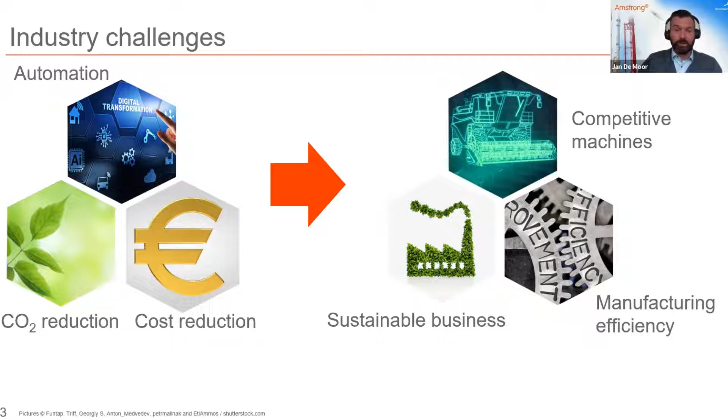The challenge is to have products more and more competitive, and at the same time the business needs to become much more sustainable. A lot of work is done on manufacturing efficiency. Today we will show you the benefits of using high-strength steels as an answer to these challenges, those of today and those of tomorrow. Without compromising the performance of the end product, smart steel grade selection will help you reach the next level of sustainable solutions at an affordable cost.

Great, thanks Jan. I've just got a question, if I may, at this stage. I wonder how the steel industry, and you and your company in particular, are implementing new technologies such as automation, which we've mentioned.

Well, we can take an example of our galvanization line in France. In a nutshell, we are completely redesigning the process with more automation, more control screens per station or workstation, more mobile tools to work along the line, but also automated and digital shape control for hot strip production with full data processing.

We could also talk about buying our steel on digital platforms with integrated EDI, where certificates, mechanical properties, order confirmations and the ordering system itself can be digitally transmitted, so that it can be completely integrated into the road map towards Industry 4.0.

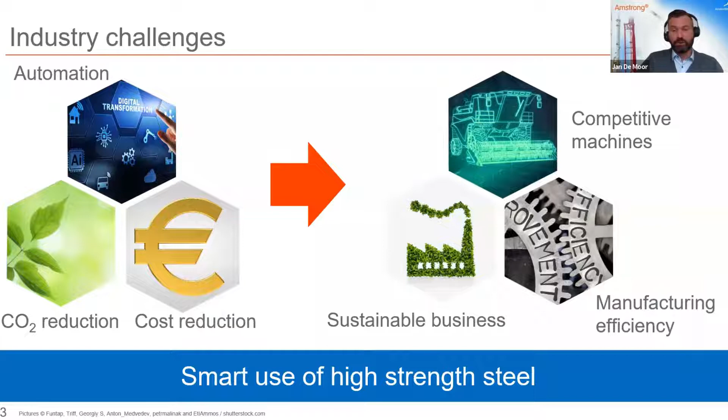But let me introduce now what we could achieve with high-strength steels. This webinar is based on the results of real case studies with real outcomes in terms of weight, cost, and CO2 reduction. To achieve these outcomes, we invite you to join our journey to a more sustainable use of steel.

Our experts can help you select the smartest steel grade for your application, and they can think along with your design team and suggest cost-effective alternatives. Thanks to our result-driven R&D efforts, we can support the introduction of new steel grades in your manufacturing facilities, for example by providing recommendations on bending, welding, corrosion protection, etc.

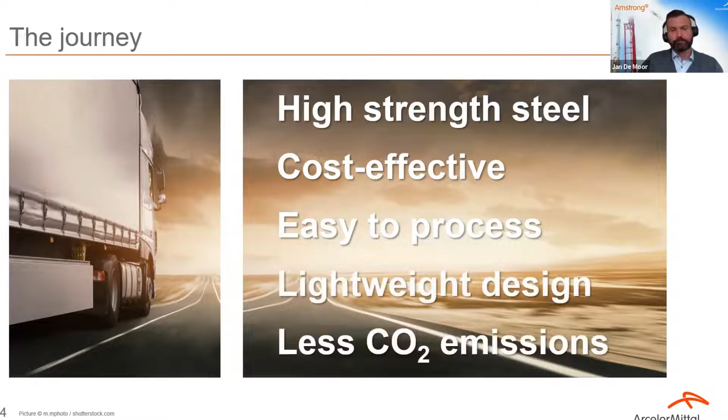This webinar will demonstrate the potential of high-strength steels on saving weight, increasing service time, and many more advantages, all contributing to reducing CO2 emissions.

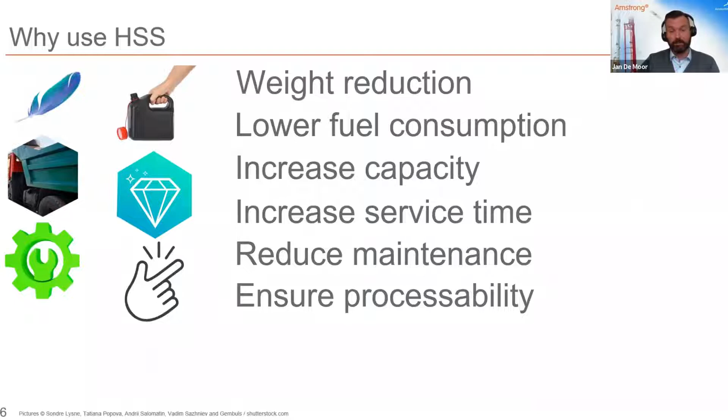Indeed, that matches pretty well what high-strength steel can bring, what we have already instigated, and what I summarized in my next slide. Switching to high or even ultra high-strength steel grades opens really a door to new opportunities generated by their weight-saving potential and excellent bending properties. Especially when we consider weight reduction, lower fuel consumption, increased payload, increased service time, lower maintenance requirements, but also improved weldability, good or direct paintability, and at the same time reducing the environmental footprint.

Real life results have already proven the benefits of the use of high-strength steels, and as such at ArcelorMittal we are willing to go the extra mile.

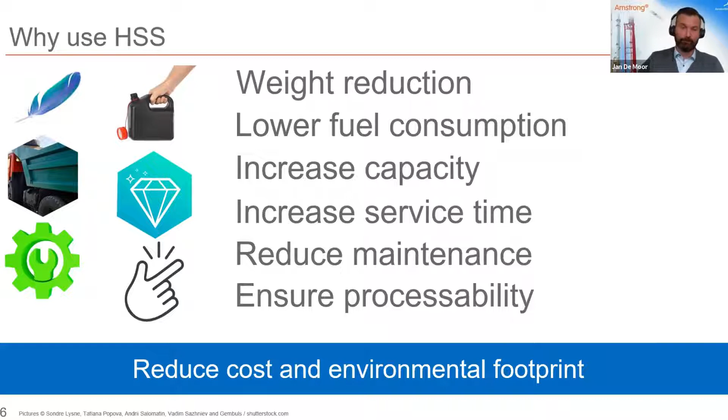We offer our customers a co-engineering service providing support in design, prototyping, sampling, testing, and applying for the final homologation. On-the-spot technical assistance on bending, welding, painting, etc. is available to help you with the transition towards these new kinds of steel grades and possible solutions.

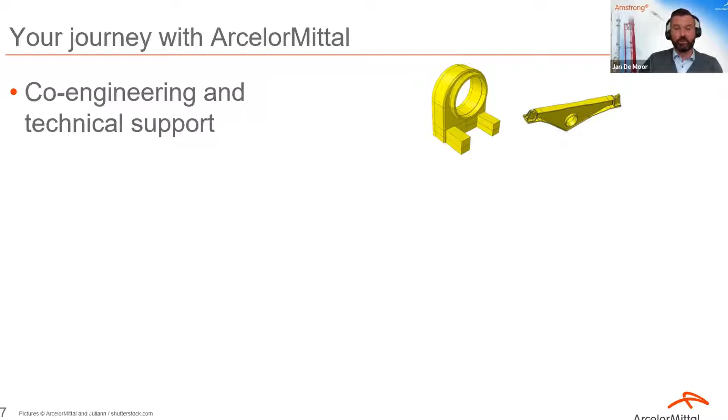Our global presence assures local production and availability of our products at your proximity, contributing towards a green and sustainable supply chain. In our continuous strive towards improving your processes, we can now even offer XCarb Green Steel certificates and certified recycled and renewably produced XCarb RRP, as that is our branding.

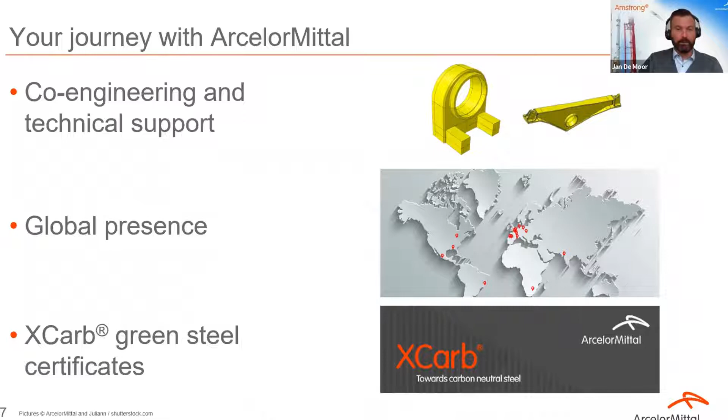All these results in an attractive product range offering several brands with adapted metallurgy for dedicated applications. Amstrong is our main brand for hot rolled high-strength low alloy steels, up to 1100 megapascals and beyond. Typical applications are earth-moving equipment, trailers, trucks, tippers, buses, cranes, agricultural machinery, and railway wagons, but not to forget racks, lighting poles, and even profiles.

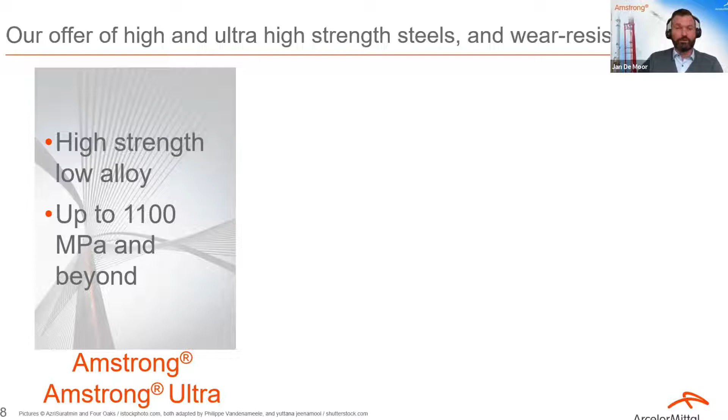Our offer of hot rolled wear-resistant steels, which we brand as Relia, in cut-to-length sheets and plates up to a hardness level of 500 Brinell, where the main use is equipment for excavation and bulk handling, crushing and screening, demolition, waste and recycling equipment, cement and other industrial applications.

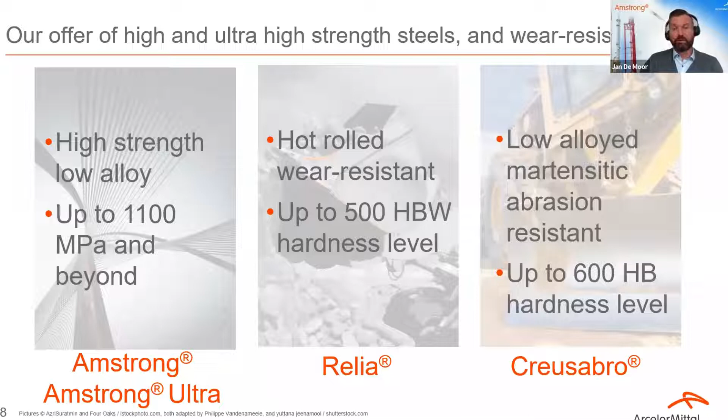But we further expanded the range with our Creusabro discrete plate offer in low alloyed martensitic abrasion resistant plates up to even a hardness level of 600 Brinell for even the more critical wear parts.

Looking at our Amstrong and Amstrong Ultra high-strength steel portfolio, our current range goes from 355 yield strength up to 960 megapascals yield strength, with the 1100 range currently in development.

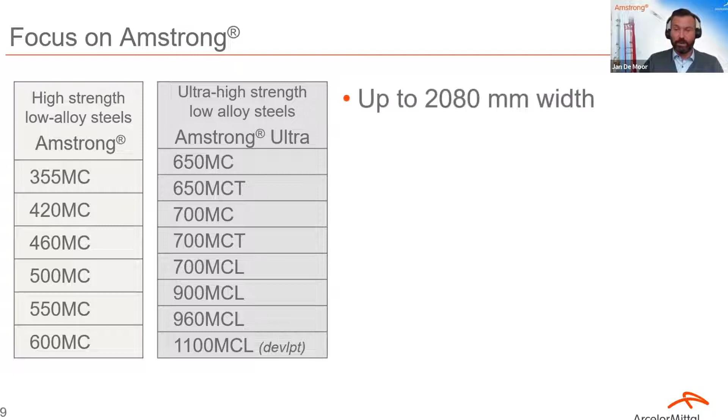Dimensionally, we can offer up to a thickness of 20 millimeters with a width of 2080 millimeters, available with superior surface aspect, excellent flatness, and minimal residual stresses.

I pass now the word to Sofie Vanrostenberghe. Sophie is heading the Applications and Solutions Department of the Global R&D Center in Ghent, Belgium. Her team handles projects in which the benefits of using high-strength steels become much more tangible, as we will show. Sofie, the floor is yours.

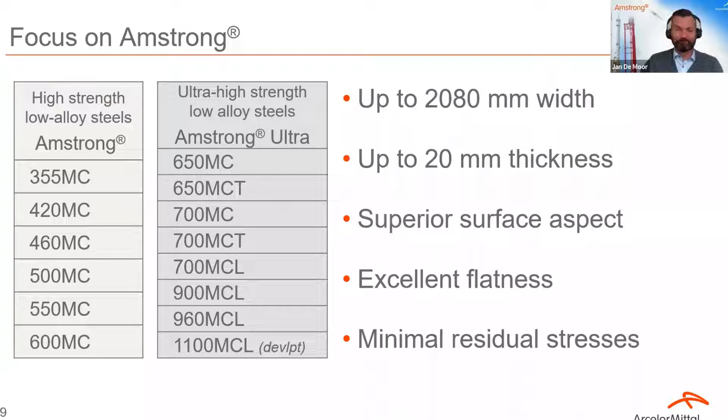Thank you, Jan. I invite you now to have a look into examples taken from real-life projects in which typical S235 or S355 grades have been replaced by our Amstrong and Amstrong Ultra grades, reaching strength levels of 420 to 900 megapascals.

But before diving into these examples, it's important to know that we can provide full support, from design to bending and welding, and even help in prototyping. At ArcelorMittal, we have a team of experts that can handle numerical simulations to choose the smartest steel for your application. We also have test equipment in-house to validate new designs or prototypes in our labs in Belgium.

Hi Sofie, sorry to jump in. I've just got a quick question, if I may. I know that you guys are always working on new designs and prototypes, and while I understand some things you can't share, and I wouldn't want to get you into any trouble, would you be able to give us a flavour of some of the things you're working on at the moment?

Well, we will unveil some of our ideas in this presentation today. I will present new designs and prototypes, some very recent, and you will see that our approach is not to force customers into 100% high-strength steels, but we try to have a more balanced approach, as in many cases, the right answer is a combination of various grades, some more traditional and some more innovative.

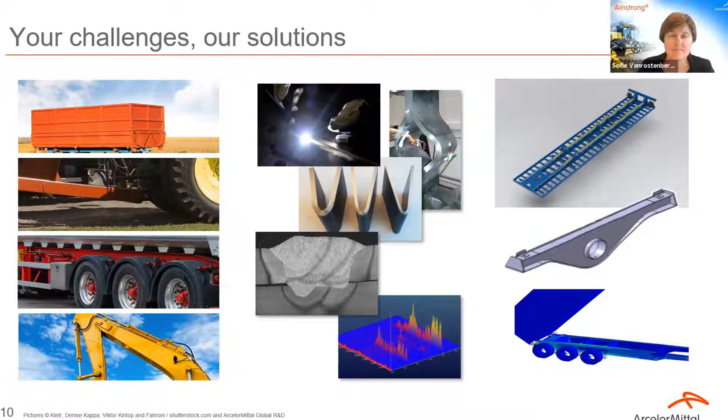So on the next slide, I'm going to zoom in on a couple of example cases we've studied. In the field of agricultural applications, for instance, we've looked into container bodies, where we switched from a lower strength S235, S355 grade to Amstrong 420 and 700. This represented a 20% weight reduction and a 5% reduction in steel cost.

Furthermore, also in this case, a redesign of the container body itself was considered, and 75 meters of welds were avoided, which of course significantly impacts the manufacturing cost.

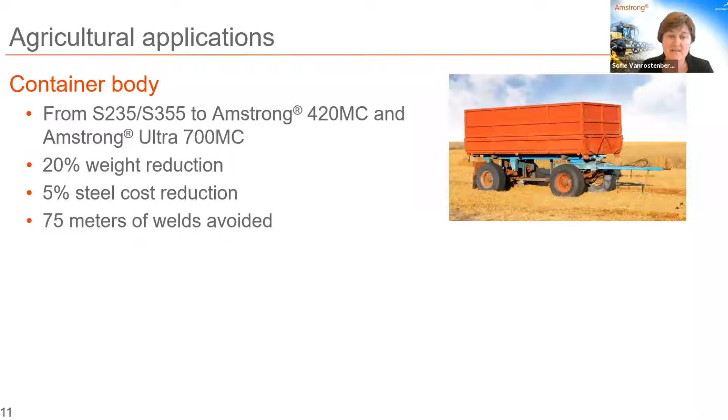Another example in the field of agricultural applications is the hinged tow bar, which is the part making the connection between the tipper and the tractor. Here the S235 grade was replaced by an Amstrong 500 and an Amstrong Ultra 700 grade, representing a weight reduction of about 40% and a steel cost reduction of 25%. We also investigated the manufacturing of the part, proposing to switch from the original patchwork-like welded structure to a bended structure, thereby avoiding costly welding operations.

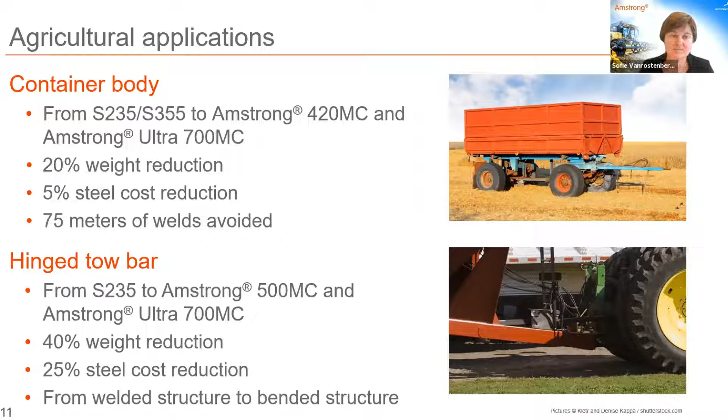On the next slide, you'll see other case studies in the field of yellow goods. The first is a dipper arm, where an S235 commodity grade was replaced by an Amstrong Ultra 700 MC, resulting in a 20% weight reduction. A prototype was made and tested for fatigue lifetime, and the design goal was by far exceeded.

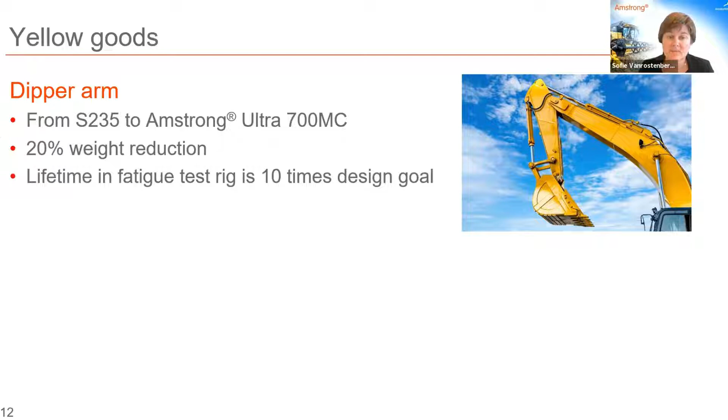A second case was the bogie beam of an articulated hauler. Initially, the part consisted of a combination of cast part and steel sheet material. The S355 sheet material was replaced by an Amstrong Ultra 700 MC. Here also, a prototype was made and put on a fatigue test rig, and its fatigue lifetime exceeded 3 times the fatigue life of the current design.

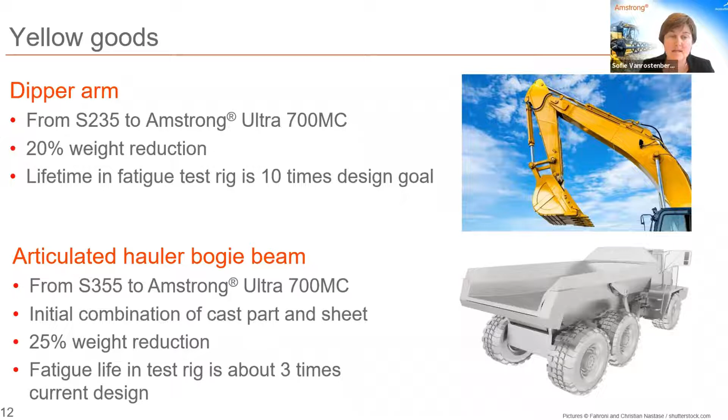In the field of lifting equipment, we analyzed and optimized the beam profile of a truck-mounted telescopic crane, aiming at improved stiffness. The combination of high-strength Amstrong Ultra 700 or even 900 MC, together with design improvement, made it possible to increase the reach and lifting capacity of the crane.

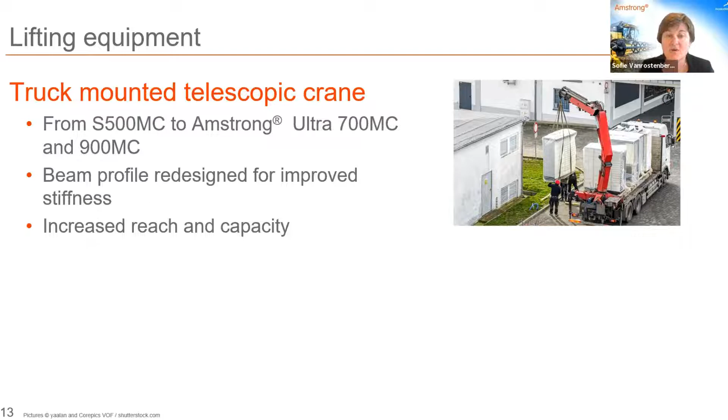A last example in lifting equipment is a forklift cabin. The main challenge here is the fatigue behavior and also impact resistance, since the cabin should protect the driver from falling objects. A detailed analysis was done using our simulation tools, and for the majority of the parts, the lower strength commodity grade was replaced by an Amstrong Ultra 700 MC. This finally resulted in a 15% weight reduction.

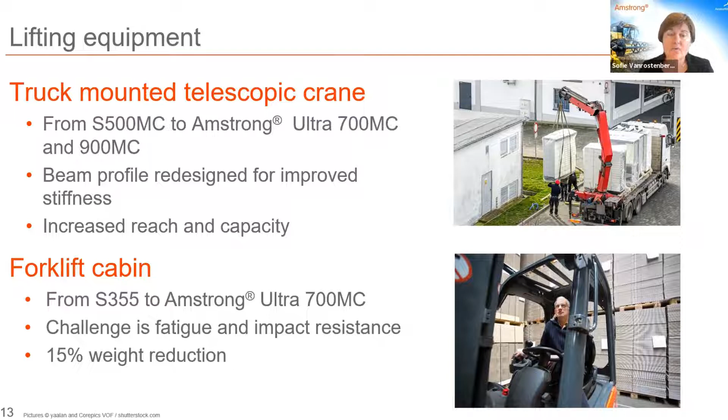A last group of applications we'd like to highlight is the transport sector, specifically a trailer chassis case. We developed a steel solution replacing the S355-420 grade by an Amstrong 500 and 700 MC. This case study has shown that the weight of a typical existing chassis can be reduced by about a quarter without affecting performance. The projected mass saving reduces fuel use and can save up to 4,000 kilograms of CO2 emission per year per trailer produced. This will have a major impact on helping achieve the goals of the European Green Deal.

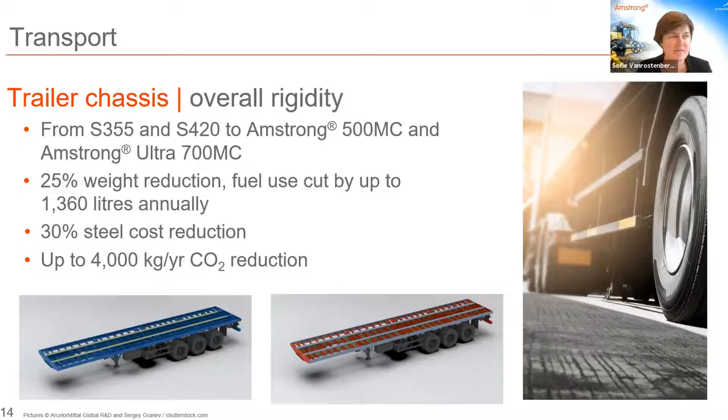So what does it mean to use high-strength steels versus lower strength grades? The projects I've just shown prove that successful transitions are possible. However, when shifting to other steel grades or changing manufacturing solutions, attention is needed to avoid issues.

This is where our customer support team provides you with valuable information on topics such as welding or fatigue. First of all, it is important to choose the right combination of steel grades for your application. And when creating new designs, take care to ensure smooth geometry, which significantly improves the fatigue resistance.

You all know that welding changes the behavior of the steel. Welds and their heat-affected zones should not induce high stress levels. So we've developed specific welding guidelines which allow you to reduce the risk of cracks or creating weaker areas in the vicinity of the weld.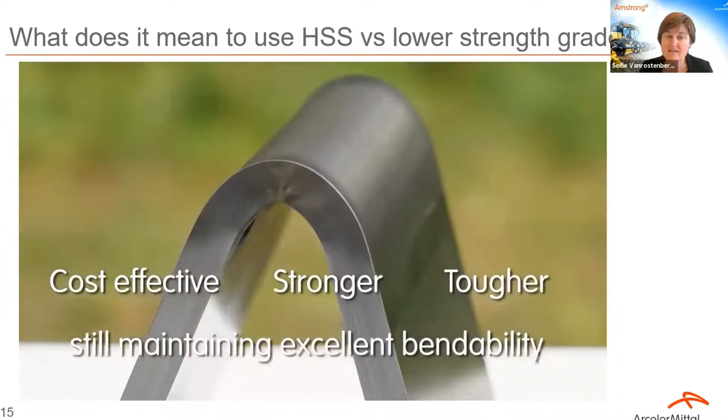When welding high-strength steels, care should be taken to limit the heat input, and we can provide you a suitable process window for welding, allowing you to select the best welding parameters using your welding equipment. Of course, we help you to choose a suitable filler wire, matching or overmatching the strength of the base material.

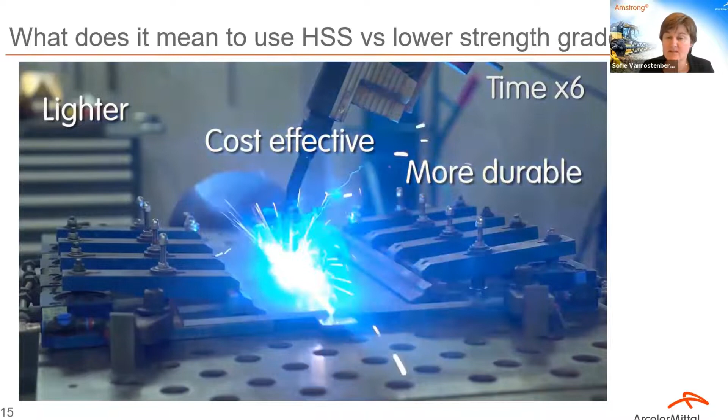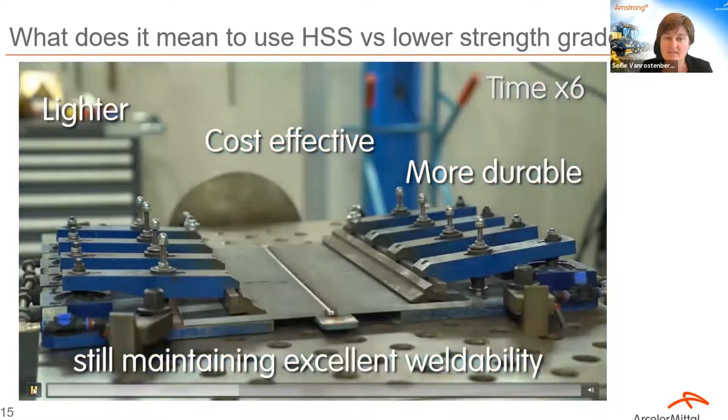When shaping a part, the bending radius and the bending gap is of utmost importance. So bending guidelines strongly depend on the thickness and should be aligned with the dimensions and the mechanical properties of the chosen grade, thus already anticipating springback.

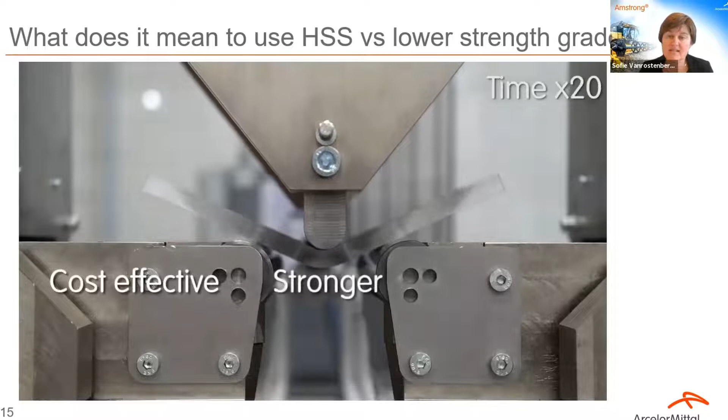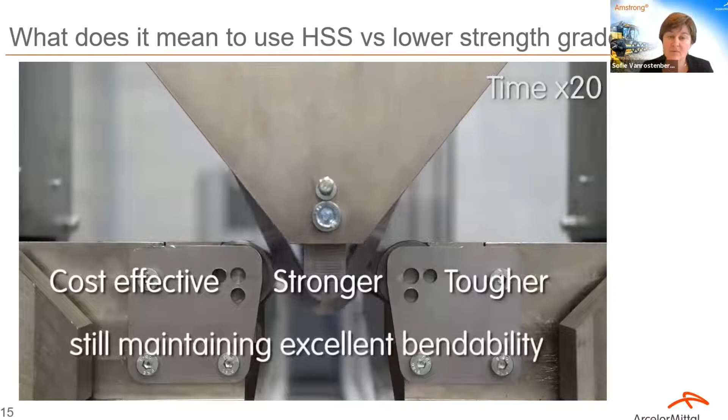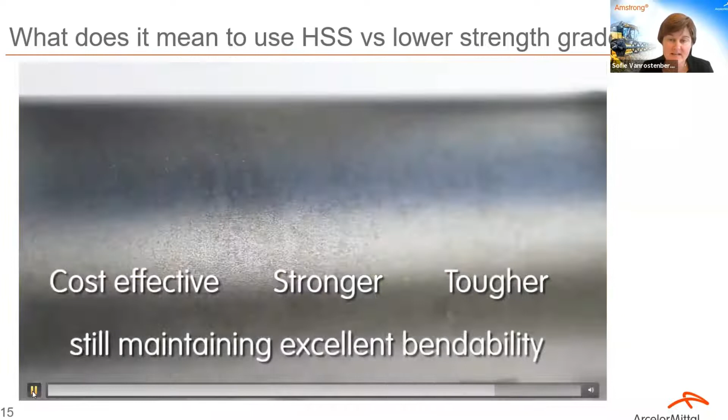Over the past decades, we have supported many customers to succeed in achieving their goals, either by helping in the design, providing guidelines during the development and production setup, and by manufacturing samples for testing or in manufacturing prototype parts for performance testing. So for an update of the most recent achievements in steel grade development, I leave the floor to Lieven Bracke, my colleague.

Within ArcelorMittal Global R&D, Lieven is the responsible product development manager for our ultra high strength hot rolled steel offer. The floor is yours, Lieven.

Thank you, Sofie, for providing some clear examples that demonstrate the potential of high-strength steels on saving weight, increasing service time, and many more advantages, all contributing to reducing CO2 emissions. Our latest developments are aligned according to various axes to increasingly improve the benefits of these high-strength steel grades for a wide range of applications and without compromising the in-use properties.

We distinguish different developments focusing on different aspects of product performance. If we compare performance to the reference that we keep in mind, which is an Armstrong 355 MC, shown as a tensile curve in green, the first group focuses on extreme strength, shown in blue. These steels go up to a yield strength of about 1500 MPa with still good bendability and toughness, and these steels are also suitable for wear and abrasion applications.

If I may, I can also give a short reply to a question in the Q&A from Mr. Vazouras, that high strength reduces the ductility and elongation of these steels, which is true to a certain extent. We cannot deny that, but we can find solutions where we can triple or quadruple the strength, and the ductility is still at a very acceptable level of 10, 12, or even 15%. So with new metallurgical tricks we can circumvent the conventional issues to a certain extent.

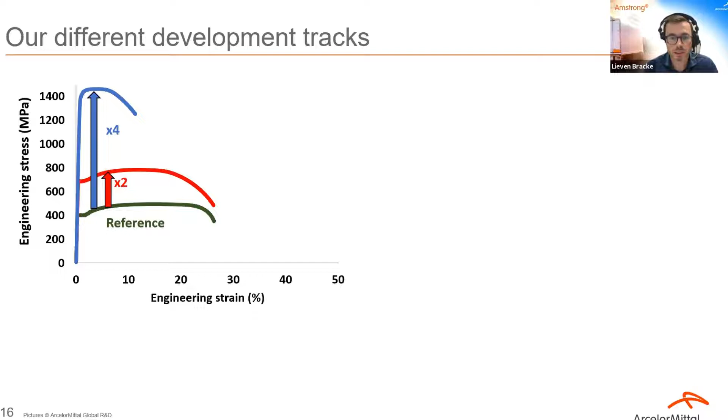That is also shown in the second development track, the red tensile curve, where we increase the strength with a factor of 2, but the formability and ductility is completely maintained compared to the reference. So you can see this steel as a kind of ultimate Armstrong Ultra 700 MC.

The third group of steels, in orange, has extreme tensile properties with a yield strength similar to the Armstrong 355 MC, but with very high elongation and strength after deformation. This type of mechanical behavior also ensures extreme wear resistance in tough conditions.

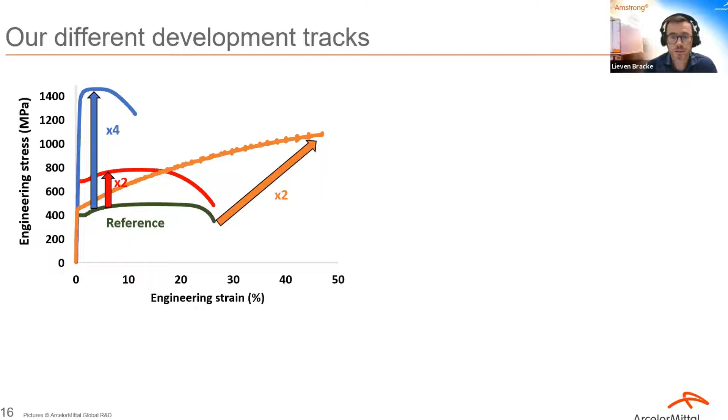Now, as already demonstrated by Sofie, key points in the use of our steels in your application are that weldability, bendability, and fatigue performance, among others, are ensured. Therefore, it goes without saying that we do not compromise on these properties to ensure that our future Armstrong and Armstrong Ultra steels still fit with your needs.

Great, thank you, Lieven, and thank you for answering that question that came in as well. That's great.

I've got a question of my own, which is, I'm curious, is the amount of information that you have on your products increasing all the time? And are you able to give more definitive answers now to different questions like weldability or lifespan?

Well, we are constantly generating additional insights into how these steels behave. It's an essential part of the iterative process to arrive at the final solution. Addressing properties like weldability or fatigue performance, to name one aspect of lifespan improvement, is an integrated part of our development approach. And at the moment that we consider a new product ready for market introduction, all these demands have to converge into the new steel grade.

I have one more question. I understand you're probably pursuing several routes in developing the high strength steels of the future. But do you have any idea, or could you share with us any information on what you think might be the winner?

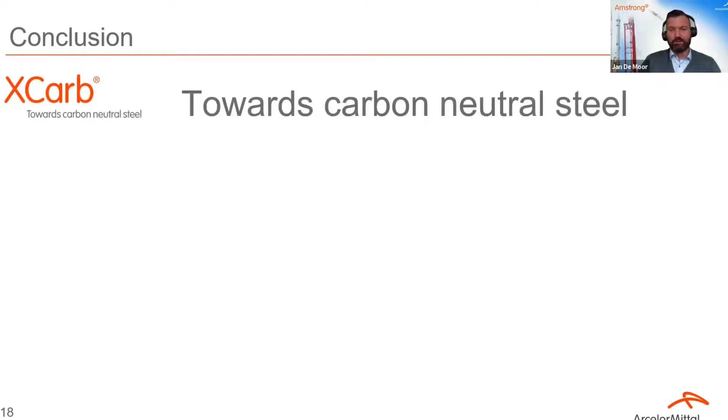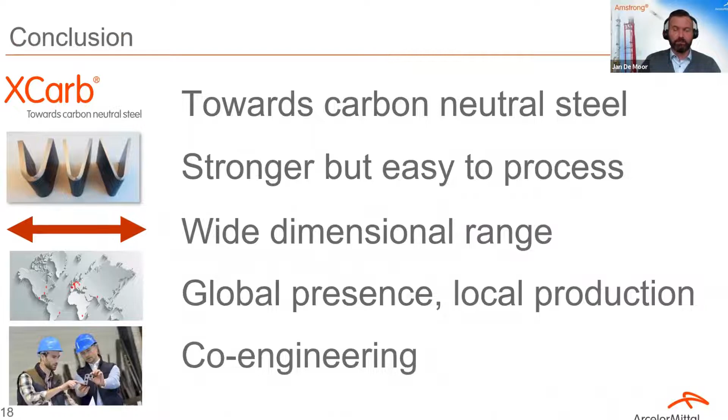We continue to expand our offer to stronger yet easy to bend steel. Our products are available in the widest dimensional range, and thanks to our global presence, we assure local production and availability at your proximity. Our supplies are supported by a technical team with access to our several research labs, to provide customized recommendations in all steps of your manufacturing process. So in that sense, don't hesitate to contact us.

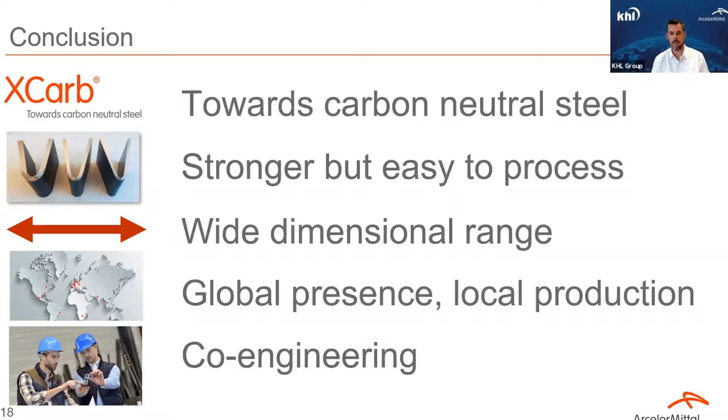Okay great, thank you. Another question which is coming to me directly asks, how can we launch a mass saving and cost reduction study for our own products? Contact us. Simple as that? Yeah. Okay well, I think towards the end we can see there that the contact details are kind of live on the screen, so you can get in touch.

One of the questions that I was going to ask was that in terms of high strength steel, whether there's any difference. We've already touched on it a little bit, but I wonder whether there's any different regions in the world where it's more popular. Would it be fair to say companies in Europe or North America are more interested, or is this something you're seeing change as well?

Yeah, I don't know if it is indeed because of this European Green Deal, but it seems to be that the Europeans are a little bit more into this than the rest of the world, you could almost say, depending of course on what principle you take.

What we presented, in fact, was basically strip mill coils or sheets. In that sense, the discrete plate solutions are more highly alloyed, in a different thickness range, and are used throughout the world, with much more availability globally.